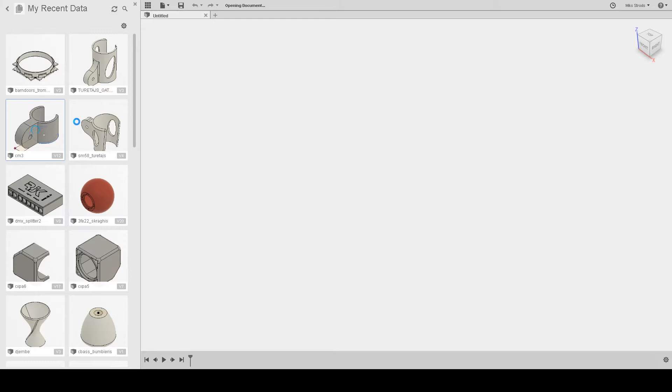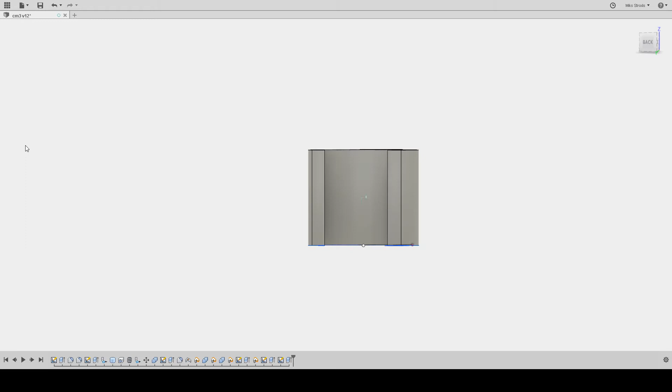So what I wanted to design is, I'll show you an example of a small condenser holder. So this is a small condenser pencil microphone holder. So it has two parts. The upper part that holds the mic itself, and the lower part. This is designed with an M3 screw and nut to hold them together. Ordinary 3/8 thread.

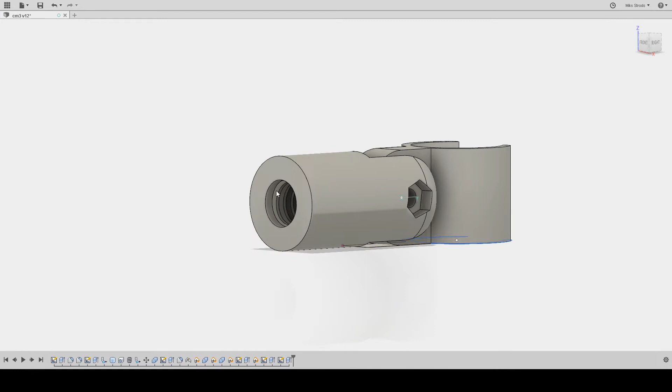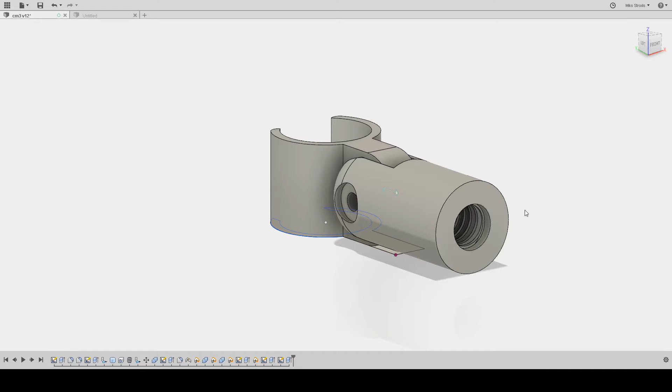I was thinking about going with a metal insert, but I tried to find them here in Europe, and it's quite hard to actually get them, so I just stick with the printed thread, and it actually holds very, very good, so that's not a problem, at least for me. I have never ruined one, so for a few colleagues that I have given these to, I guess I'll get a present for the first one who gets the thread wrong.

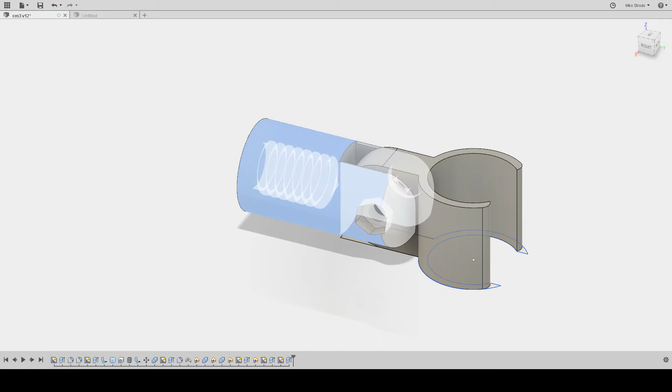So okay, so I'll take over this part, the underneath that screws. I don't want to redesign it, so this stays the same for all my microphone models, and the thing that changes is just this top one. So I need a holder for a specific mic that's not the ordinary SM58, so it has different dimensions. The colleague measured the original one, but he needs it in a different color other than black, so I just need to print it.

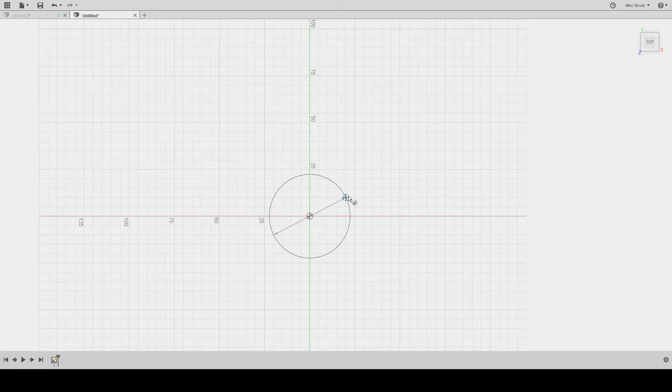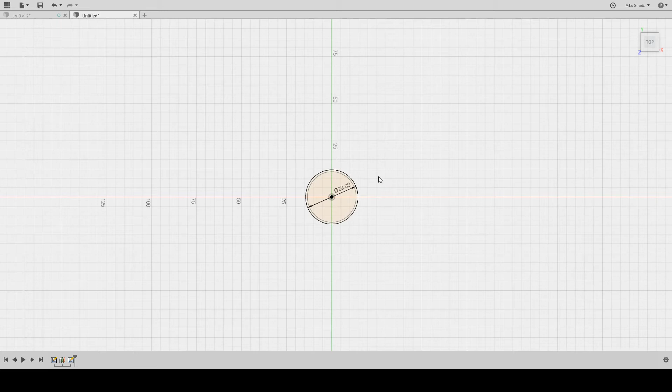So how I usually do it, I just create a sketch, then I create a circle, so the inner diameter of the lowest part is 27 millimeters. Then I take a plane, and that's 47 millimeters for that particular one, and the upper part is 29. So then I make a loft, and it's actually almost done. So it's quite a quick thing.

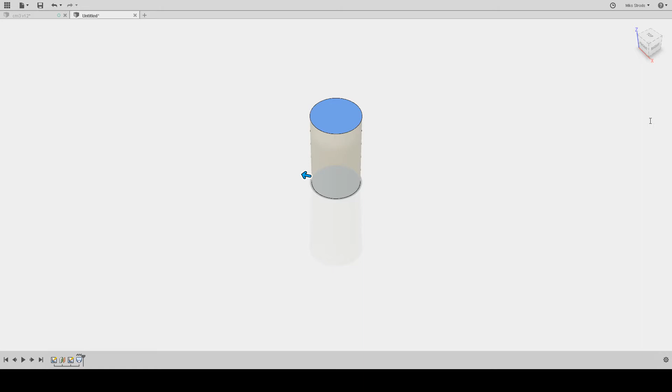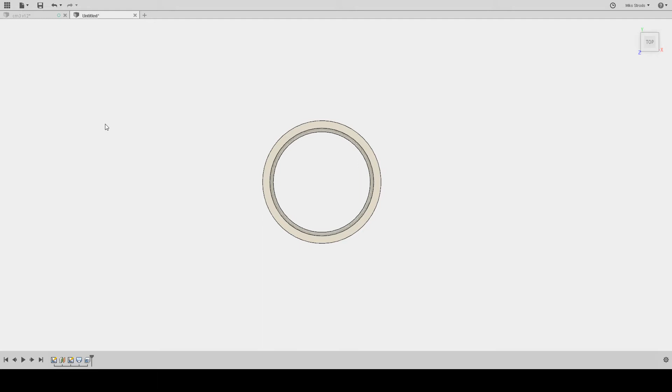I make a shell that goes to the outside direction, and what works best for PETG is 2 millimeters. It's rigid enough but still flexible. If it's a bit thicker, then it breaks easily and it's not flexible anymore. If it's less, then it's too flexible and it's kind of flimsy. So from my experience, 2 millimeters is the sweet spot for all that.

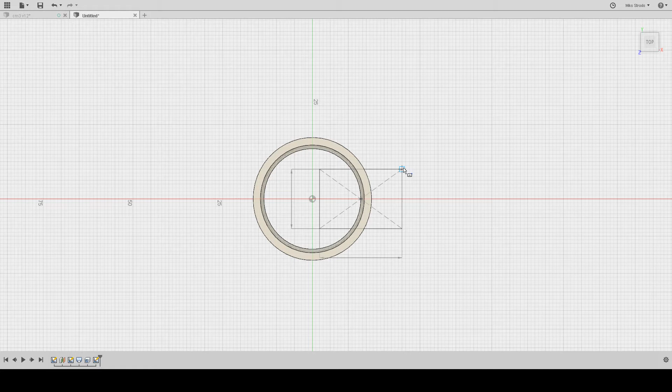So what I do next is I make a hole for the microphone, and it's basically guesswork. What's the correct, oh no, sorry. What's the correct size for the hole? I usually just get it by eye. This could be too little, and this could be too much, I guess. So let's stick with 18 millimeters or something. Yeah, that should be okay. So then I just extrude this thing, cut it.

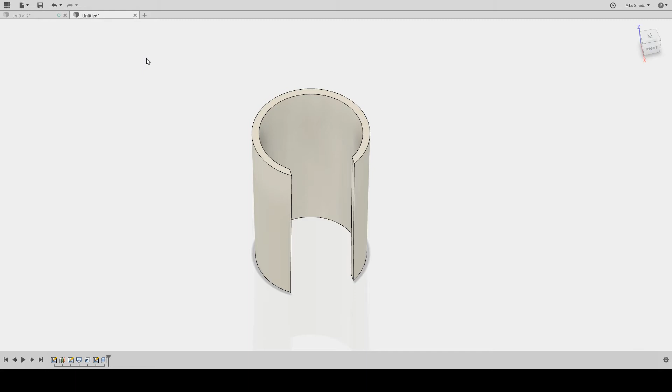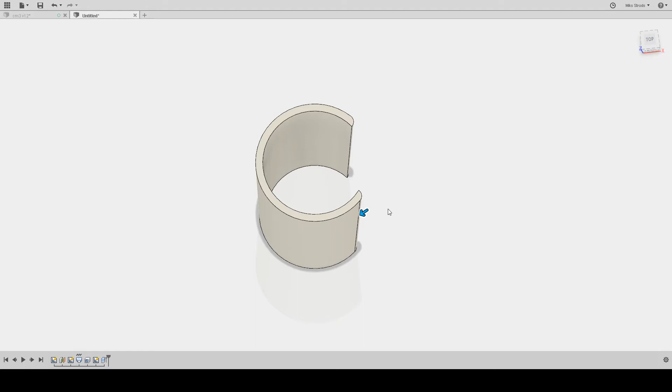Then I make basically rounded edges for it, just so it slips in more easily, because you can just pull the mic out from the center really easily, but I have seen many mic holders that have problems actually getting them inside the holder. So 3 millimeters, it can be even 4, it doesn't matter. It just looks good now, so I'll just leave it like that.

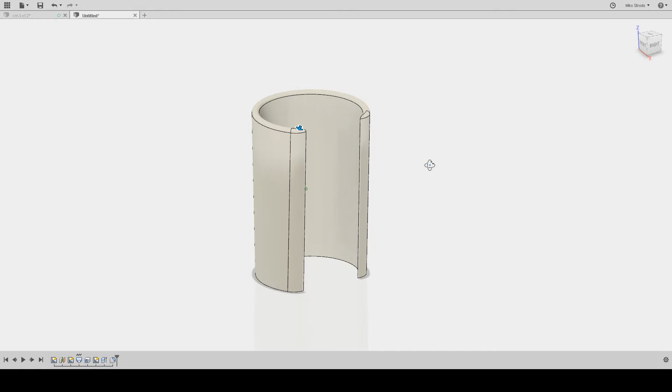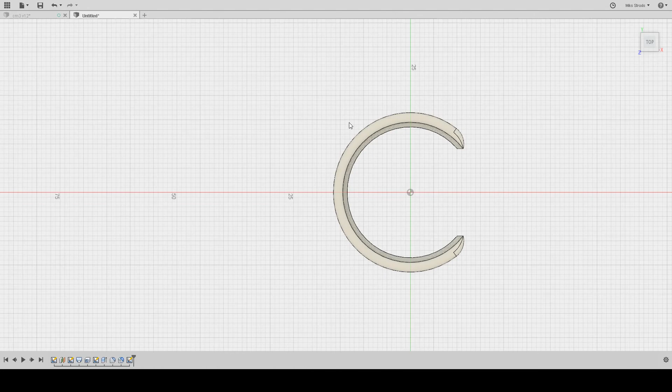Another thing, I like to have this top end just slightly rounded. It's just my liking. It doesn't have any practical purpose. So on to the next piece. Not the holder, but this part. So I don't remember what the dimensions were. So that's 8 millimeters, and this is 20. Okay. So I usually make it from the. So I don't need this one here.

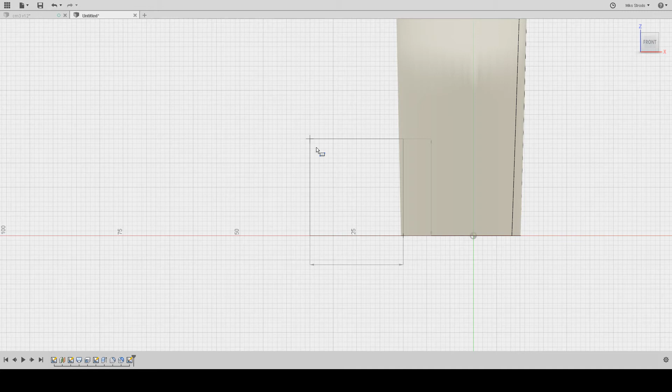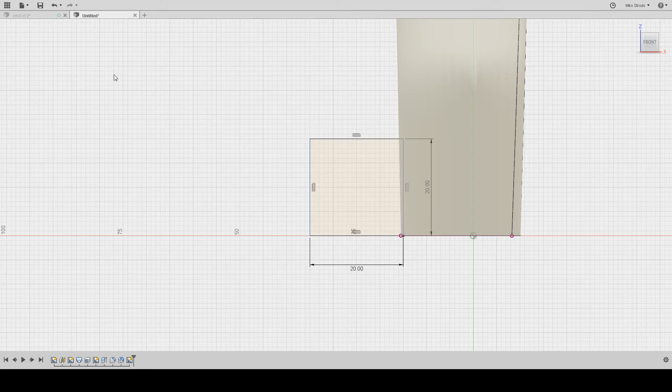Okay, so that's like 20 millimeters. So this is 20. That one's 20, and there you go. And in the middle of it, I'll make a center. That was what, 4 millimeters, I guess. Yeah, 4. So here goes 4 millimeters in center for the screw and everything.

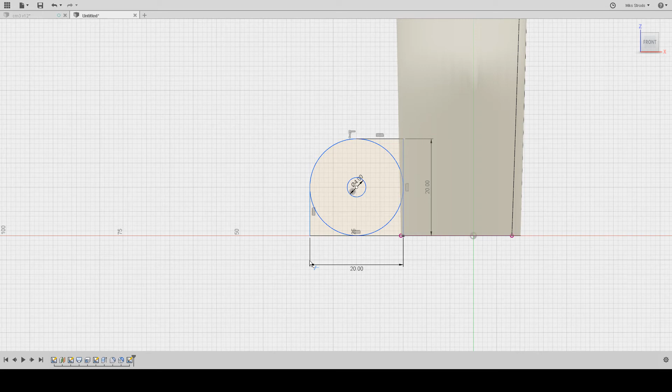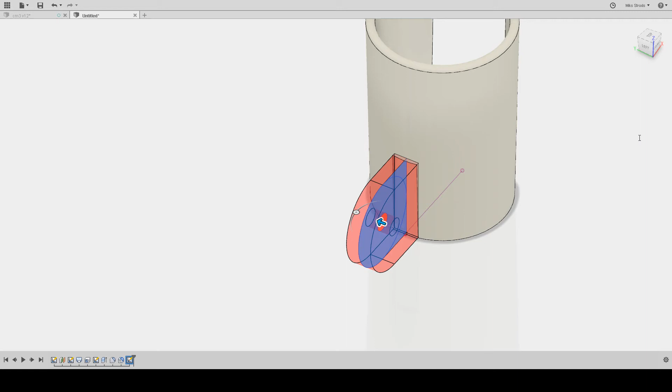Okay, I usually do this thing to have like the easy extruding without any problems. Yeah, the warning's the usual thing. Okay, so I have like center of this, then I just press and pull. That's it. A distance like symmetric, so I need it together 8 millimeters. Join, and there you go. Quick and easy way.

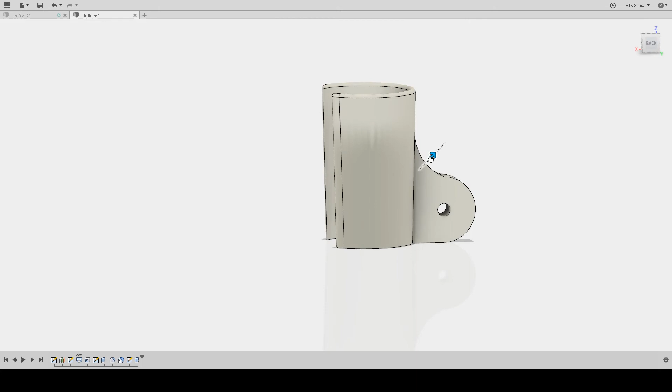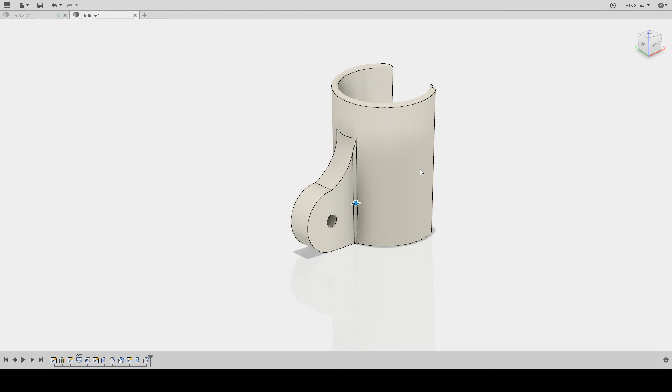It's not very beautiful at this point, so just to give it some looks like an ordinary mic holder, I usually make this thing. It also makes it a bit more rigid, I would say. Yes. Sometimes also I do these edges a bit round. No, not this. Like 2 millimeters. You can do them and maybe not. It's just up to taste.

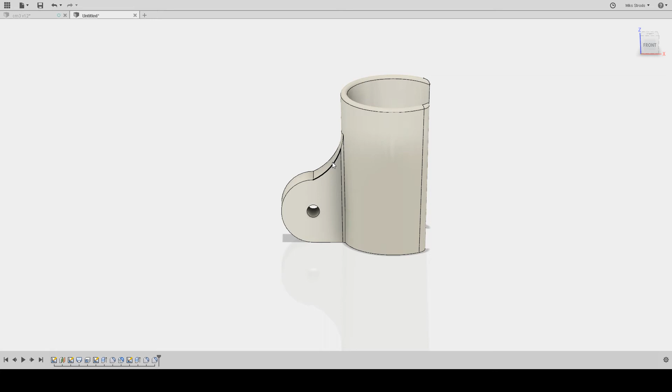I tried a design where this holder is kind of in the middle. It could be theoretically the best spot, but then I need supports for printing it, even if I do a rounded edge underneath here. So I just stuck with printing the holder part here on the lower end, because then this has a natural support from the heatbed, and it sticks to the heatbed really well. And this part is quite okay. The angle here is something that usually would need supports, but it's not that bad. It's really down to tweaking your printer.

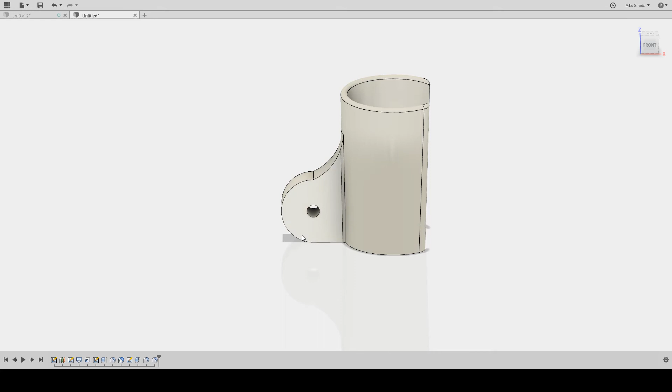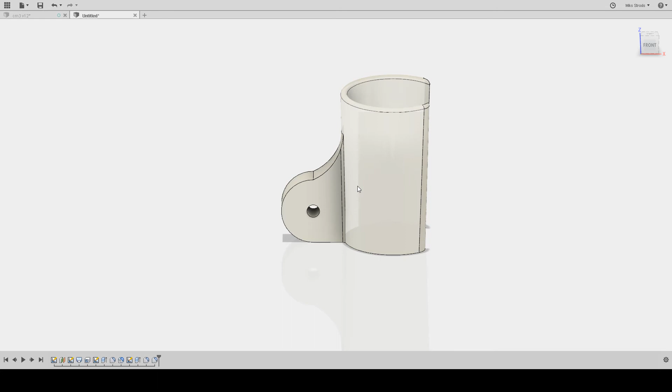If you're printing with PLA, which I don't recommend for these types of holders, because it's too rigid and too stiff, so it breaks easily. PETG is my go-to material for these things, because it's flexible enough to give in some directions and some ways, but it's not rigid enough to just shatter upon inserting the microphone or dropping it to the ground or whatever. So this is my advice.

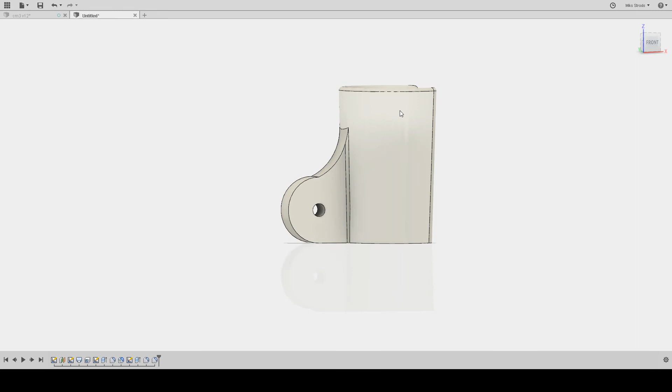So this part might not be looking good, but wait a minute. This part that could be drooping a bit is usually somewhere inside here under normal usage, so no one sees it anyway, and I really don't care about that part as long as it's flexible enough to hold the microphone and everything. One thing to make it look a bit more beautiful, I would guess, and to save on materials is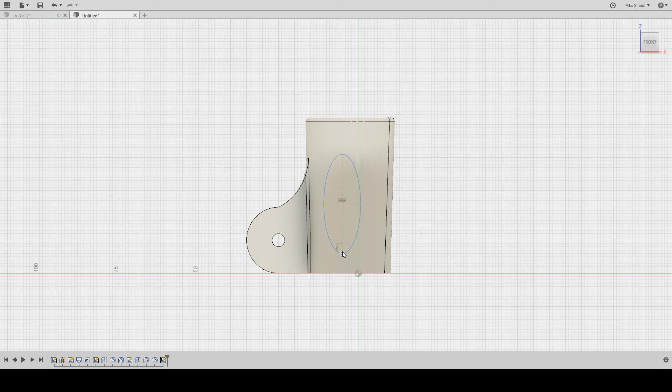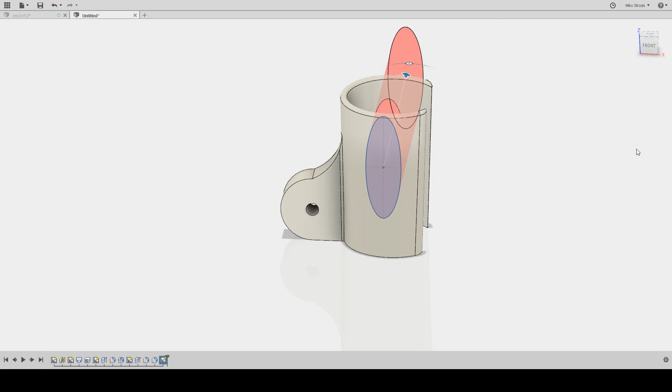actually just taking something like this, and usually I just make it something like... no. Sorry. So I just make some shape here inside, and then I just cut it. So it has the shape of an ordinary microphone. Most of the mics have some holes here to save material and to be more flexible, and that's a good thing to actually do.

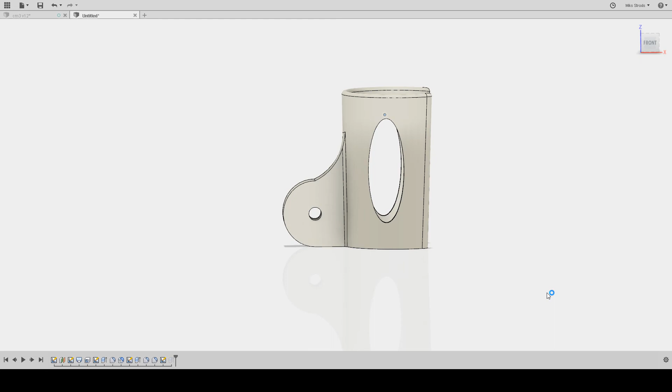Sometimes I make some other shapes. It really depends on my mood. For some custom designs that colleagues or friends or other musicians need, I tend to also add some letters showing this thing belongs to someone, in case the person loses it or whatever. So that's a nice thing to do, at least in my mind. So this is a quick and easy way how to do it.

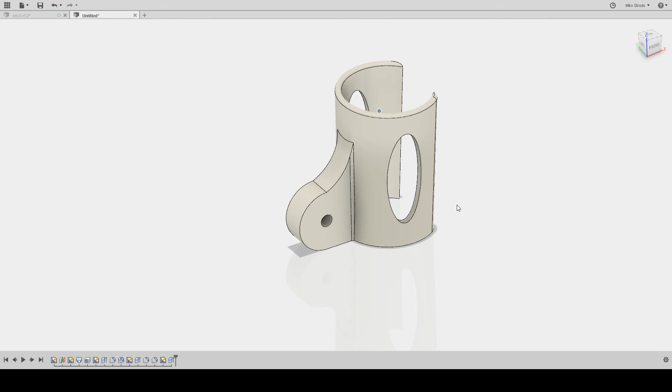I usually print it with two perimeters, two bottom layers and 3 top layers. So that's my go-to settings for this thing. I'll do some printing with it later, but this is just designing the thing. So that's pretty much all. The next thing I'm actually designing right now is a shock mount, and I still need to find proper rubber bands for it. So that will be the next thing.